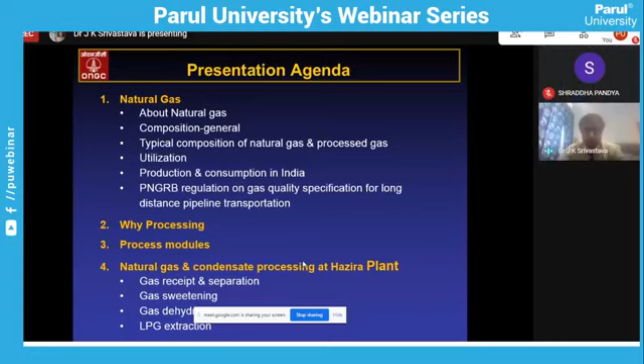Then the basic thing - why processing? Then what are the various process modules? I'll cover natural gas and condensate processing with reference to Hazira plant, because it is one of the largest gas processing plants in India, where I will briefly cover gas receipt and separation, then gas sweetening, then gas dehydration, then LPG extraction, then condensate stabilization, then dew point depression process, then sulfur recovery from acid gas.

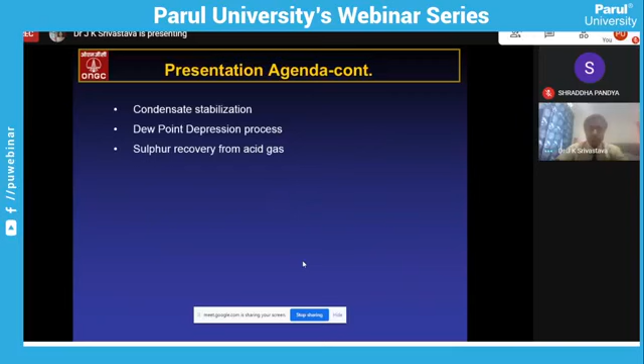Then first, let us begin with what is natural gas. Natural gas, as the name suggests, is the gas produced from geological formations from Mother Earth. You must have heard about oil wells, gas wells which are drilled, and ONGC is basically engaged - it's an E&P company, engaged in exploration and production of oil and natural gas. By saying natural gas, we mean that it's not produced by any refinery or any industry. It is what is being produced from the Mother Earth, from geological formations.

And broadly there are three distinct groups. One is non-associated gas, that occurs in the conventional gas fields. For example, in Mumbai High, there is a large field called Bassein field and Tapti field, which are gas fields where they are producing predominantly gas only.

Then associated gas, that occurs in conventional oil fields, like in Mumbai High, Heera. These are the fields where crude oil is being produced, and along with the crude oil, gas is also being produced, because no crude oil can flow unless it has gas dissolved in it. So whatever gas at the surface is released from the crude oil, that is what we call associated gas. These are fields like Mumbai High and Heera field, which are oil fields, and they are producing both oil and gas.

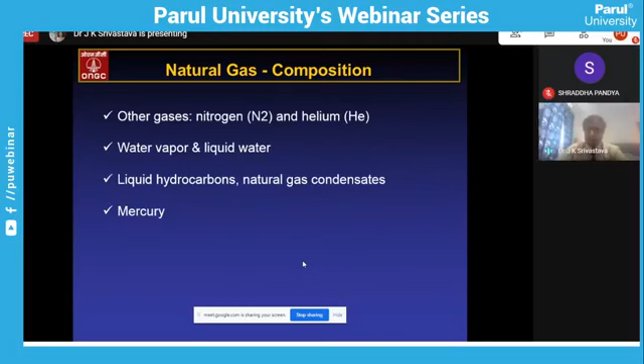It is absolutely dry, whereas the gas coming from the offshore field is fully saturated with water vapors, liquid water, everything, because it's coming through pipeline transportation from the offshore field to our shore terminal, so it has a lot of water vapor and liquid water. But once processed and sent to the pipeline to the end consumer, it is absolutely dry - bone dry, minus 62.

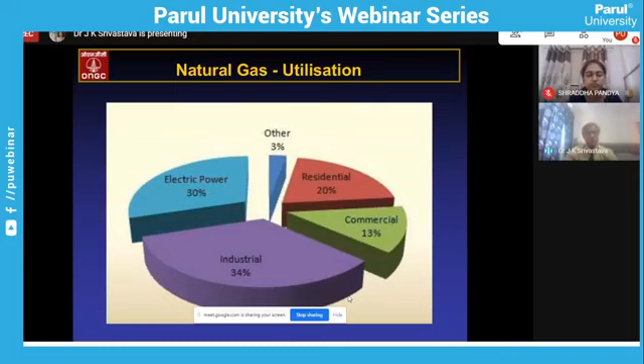Then this is the scenario within the country about natural gas production and consumption. As you can see, the total production in India is 32,876 MMSCM, that is million standard cubic meters, in 18-19. Then it dropped to 31,184, and again in 20-21 it is 28,671. Out of this, the major share is produced by ONGC - in 20-21 it is about 21,872 million standard cubic meters. Oil India and private JVs have a very small share. So the major producer of natural gas in India is our ONGC.

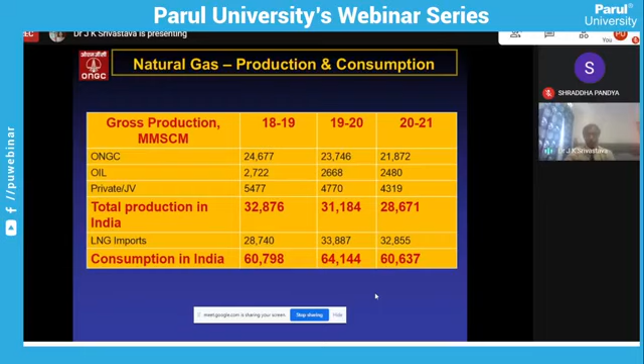When we talk about consumption in India, it can be almost double the production. Like in 18-19, it was about 60,798, or we can say 60.8 BCM, billion cubic meters. In 20-21, it has reduced, as you know, because the economy was hit during COVID and energy consumption also dropped. So gas consumption basically dropped to 61. The shortfall is met by LNG imports - about 28.6 billion cubic meters was our internal production in India, and about 32.9 billion cubic meters is our LNG import. So we are meeting the shortfall by importing. That is the scenario in the country about gas production and consumption.

Are you getting me? I am not getting any response, so I don't know whether I am audible to you or not. Yes sir, you are audible. Because in between if I can get some prompts, I am sure that whatever I am telling is going to the other side, because I cannot see the other side. No sir, you continue please, you are audible.

Now the basic question comes about natural gas processing. Why processing? That is what we are talking about, and that is our subject today: natural gas processing, why processing?

Basically, raw natural gas, when it is produced at an oil well, be it offshore or onshore, and when it is transported from the field gathering network to any processing station, it has a lot of what we call undesirables or impurities. So raw natural gas as such cannot be sent to any consumer or to any long distance pipeline system for the use of the end user.

So what are the basic objectives of natural gas processing? First, whenever raw natural gas is there, it is a mixture. It has natural gas, condensate, non-condensables, acid gases, water, and some sort of dirt and solids also. So it is not fit for use by the industry or for transportation.

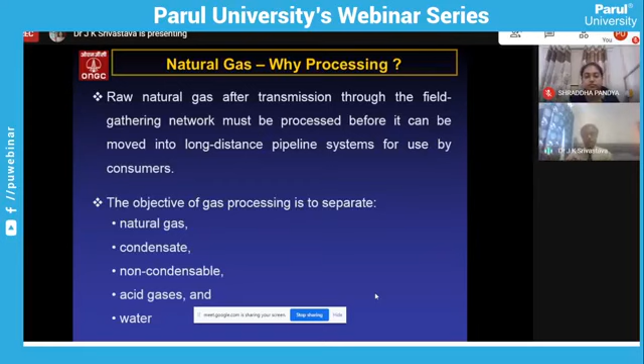Now we will see largely what problems these impurities or undesirables create. First, we see water vapor. It is a very common thing because in oil wells there is always a water drive in the reservoir, and whenever oil and gas is produced, water and moisture will always be there. So it is the most common impurity.

It is not objectionable as such, but liquid water - what happens? First, when a pipeline is pushing oil and gas, if it has liquid water, it will accelerate corrosion in the presence of H2S gas or CO2. So for any corrosion to initiate, liquid water has to be there. The gas anyway has CO2 and H2S, both of which are corrosive when combined with water.

Another phenomenon you may be aware of is that during pipeline transportation, because of expansion, the pressure drops, the temperature also drops, and cooling takes place. During this cooling, the temperature may drop to a level where the liquid water present in the pipeline may form gas hydrates - solid hydrocarbon or ice - which may block the transportation of gas in the pipeline. That is one of the major challenges.

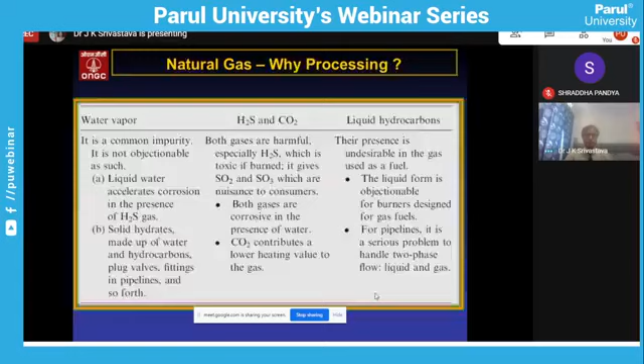So you can see these are the reasons why the gas needs to be processed before it is put to any economic use, before it is transported and other things. I'll discuss hydrocarbon dew point a bit more when we talk about the dew point depression unit, DPD.

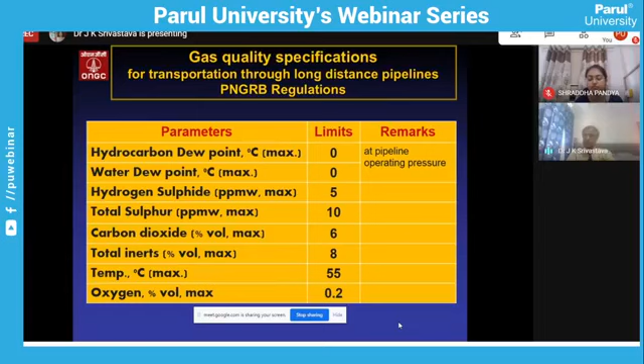Water dew point, as you know, is the temperature at which the gas-water system gets saturated with water vapor, and any further drop in temperature will lead to condensation of water vapor in the system. Hydrogen sulfide, total sulfur, these are the limits which one has to abide by, every producer has to abide by if it has to push its gas into the national pipeline or cross-country pipelines.

The various general process modules for natural gas are: the first unit of the module is the physical separation of the distinct phases, because normally these pipelines carry multi-phase flow—crude oil, gas, water, condensate. So first, the physically distinct phases—gas, liquid hydrocarbon, liquid water, solids—have to be removed at the receipt, at the entry point, what we call the battery limit of the plant. The first thing, where gas or condensate is received from the offshore field, is to separate these different phases before it is processed further.

Then the next processing step is gas sweetening. When CO2 or hydrogen sulfide is in significant concentration, the gas is to be sweetened for further processing. So gas sweetening is a very important process. In gas sweetening, depending on the end use, the cleanup target is decided.

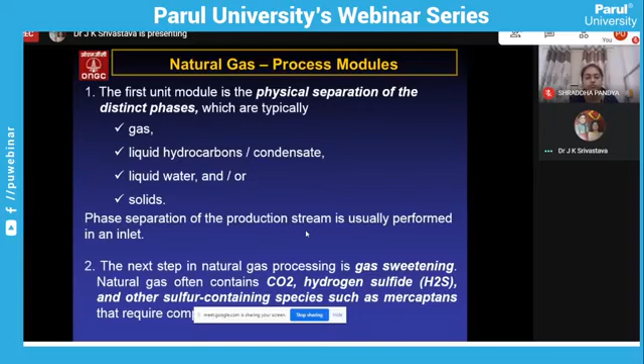Then gas dehydration module, as you know, because during the process of sweetening, which is mostly using the aqueous solution of amines, different types of amines or any other solvent, the gas is fully saturated with water vapor, because the temperature is also high, pressure, low pressure is there, so gas is fully saturated with water vapor. So before it goes to further process units, it is to be dehydrated enough so that it goes to further processing units. So gas dehydration is there, the gas dehydration module.

Then dew point depression, as I talked, because natural gas liquid recovery is there. Whatever heavier hydrocarbons are there, C3, C4, C5 and higher, they have to be recovered in that module. Then next thing is that condensate, because gas and condensate both are coming from the offshore. So condensate also has to be stabilized, fractionation module.

Then desulfurization of acid gas. When we talk of desulfurization of acid gas, because when we sweeten the natural gas in our gas sweetening unit, the resultant gases are, one is sweet gas, another is the acid gas. Means after scrubbing all the CO2 and H2S, that gas is vented, so that is called acid gas. But that gas contains very high concentration of say H2S, more than 10,000, 20,000 ppm, and that as such cannot be vented in the atmosphere because of the regulations, and otherwise also it cannot be vented in the atmosphere.

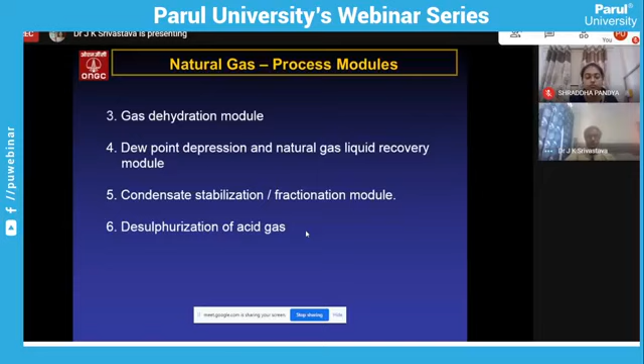These are the general process modules of a gas plant. Now instead of these general process modules, I will tell you the case study which is very apt for the Hazira plant, because Hazira plant is one of the largest gas processing plants in India. It has a design capacity of about 46.9 MMSCMD. It is processing 33 to 35 MMSCM gas per day and about 5,000 cubic meter of condensate per day. So that is the general background of the plant.

You see, I was telling about these. These are the fields in Bassein field, which is the largest gas field in India. Then this is Tapti field. So from Bassein field and Tapti field, there are two large process platforms, which we call as BPA and BPB. So two pipelines under sea, these two pipelines are emanating from there. One is 36-inch diameter and another is 42-inch diameter.

They are on the seabed, and the length of the pipeline is about 242 kilometers. These are the trunk lines in which the gas and condensate produced by Bassein field, Tapti field and other smaller fields are pumped. And from Bassein field, it is coming to Umbharat, that is a place near Surat, which is the landfall point. From the seabed, it is now on the land, coming at Umbharat. And Daman field also recently started producing, that is also pumping into these pipelines.

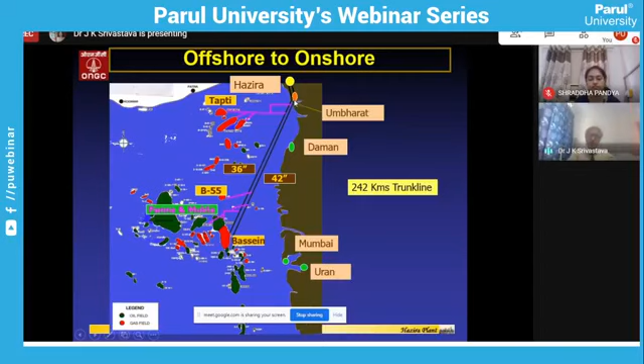Daman is also producing gas. So this is about 242 kilometer length, two pipelines, one is 42 inch, another is 36-inch pipeline. From this offshore field, that subsea pipeline is coming at the surface near Umbharat. So at Umbharat there are two valve stations, and this pipeline undergoes under what we call the Mindola and Tapti rivers. These two rivers are there, and these are the various valve stations. And now it is coming and joining at Hazira plant.

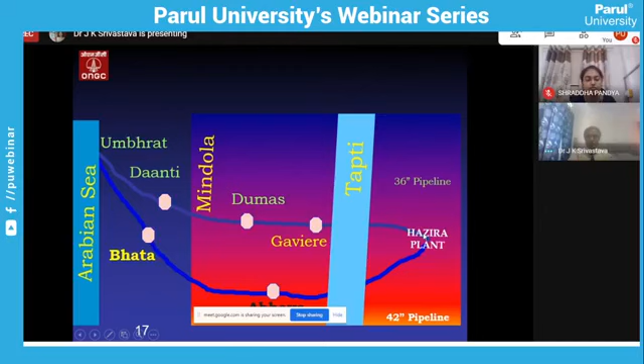This is Hazira plant. It is very important because this is the energy lifeline of North West India. All of you must have heard about the HBJ pipeline, Hazira Vijaypur Jagdishpur pipeline. That pipeline is now operated by the Gas Authority of India, and it is more than 3,300 kilometers long.

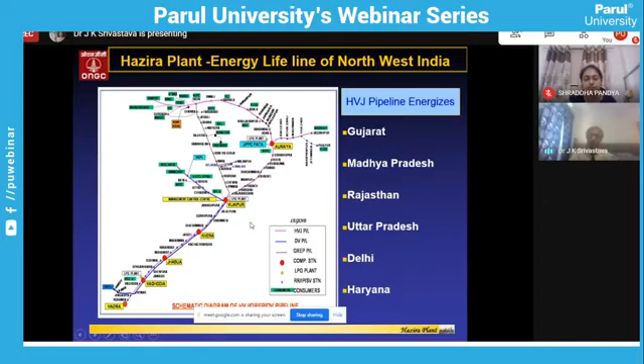It carries gas to about 6 states throughout India. Our plant, Hazira plant, is the mother plant of this pipeline. So we are giving gas to this pipeline, and just opposite Hazira plant, this GAIL terminal is there. From there GAIL takes the gas, we transfer it into that pipeline to GAIL, and further onwards GAIL looks after the pipeline transportation, and it goes all the way up to Delhi, Haryana. The pipeline length is about 3,300 kilometers.

Now I'll show you the various processes, a block diagram of the various process modules, or what we call the process flow. So the gas and liquid both come first to the gas terminal. That is the battery limit, what is called the gas terminal.

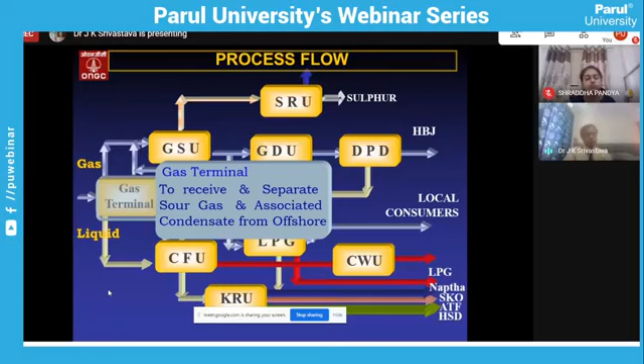In the gas terminal, the purpose is to receive and separate sour gas and associated condensate from the offshore. So from the gas terminal, there are two streams: one is gas, another is condensate. The gas goes to the gas sweetening unit. That sour gas which is separated at the gas terminal goes to the gas sweetening unit for removal of H2S, and we are using the MDEA process, by selective absorption in methyl diethanolamine, at the GSU.

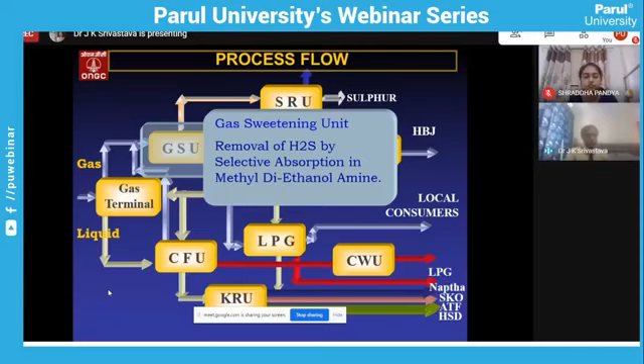Then from GSU, that gas goes to the gas dehydration unit. As I explained, in the process of sweetening, the gas becomes fully saturated with water, so we have to remove all the water, moisture, water vapor, everything. So from GSU it flows to the GDU, gas dehydration unit.

And in the GSU, whatever is the vent gas or effluent, what we call acid gas, goes to sulfur recovery. From the sulfur recovery unit we get solid sulfur, and then the resultant gas after sulfur recovery is vented. That sweetened gas, or sweet gas as we call it, goes to GDU.

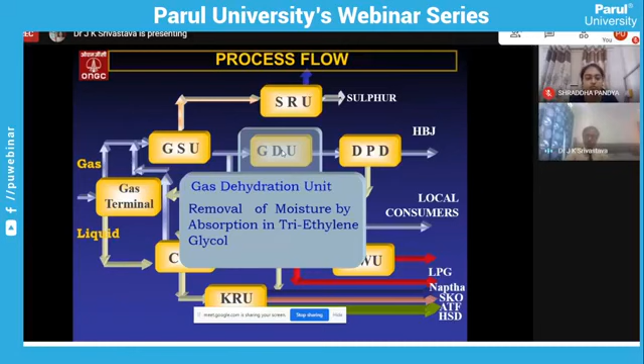At GDU it is dehydrated, and I'll explain the process briefly afterwards. Then from GDU it goes to DPD, the dew point depression unit, for removal of liquid hydrocarbon to make it suitable for transportation through the pipeline, now increased to 2,800 kilometers in length. Because during transportation, liquid hydrocarbons may drop out in the system, which can create operational problems.

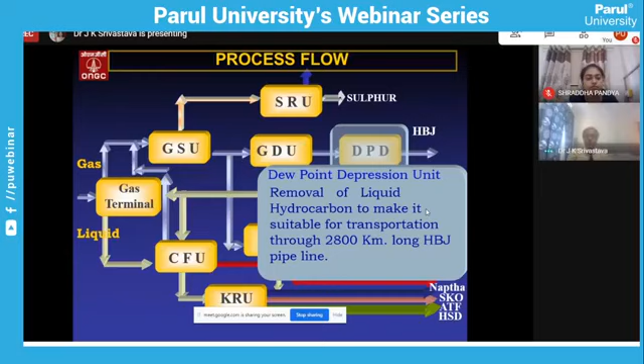That can reduce the pipeline carrying capacity and other things. The dew point depression unit is designed this way because along the HBJ pipeline, GAIL has also put up some LPG plants and petrochemical plants. In LPG and petrochemical plants, they require some concentration of higher hydrocarbons like C3, C4 and others. So the DPD is designed such that we cannot remove all the heavier hydrocarbons here. Some amount of heavier hydrocarbon passes through, and that is the condition of hydrocarbon dew point, which is as per PNGRB guidelines. It has to be maximum 0 degrees centigrade, whereas we try to maintain it up to -5, so that condition is also met.

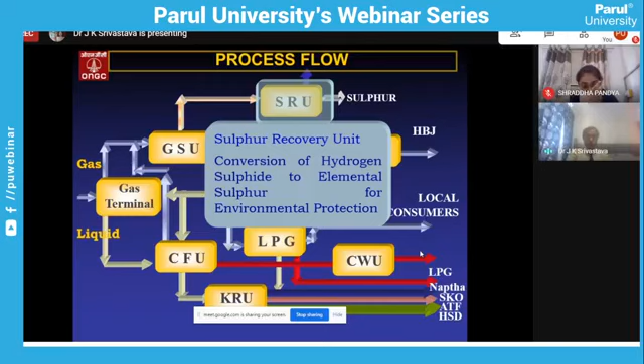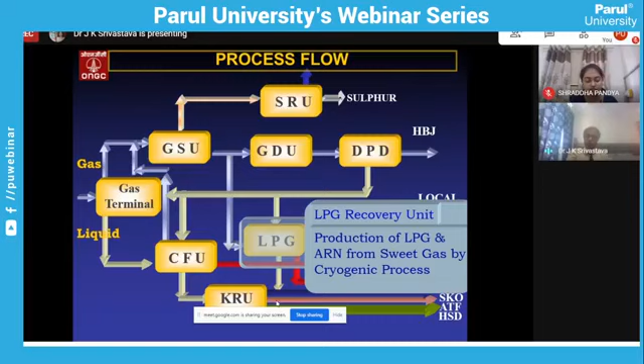Then at sulfur recovery, as I explained, we convert hydrogen sulfide to elemental sulfur for environmental protection. And from GSU, part of the gas comes to the LPG plant. From GSU the sweet gas splits: one part goes to GDU, and another part comes to the LPG plant, where we produce LPG and naphtha from the sweet gas by a cryogenic process. The LPG is produced using the cryogenic process, which I will briefly explain.

Then the condensate - this is regarding the pathway of gas. Now from the gas terminal, another stream, the liquid stream, is condensate. It first comes to the condensate fractionation unit, because that condensate is also sour condensate, having H2S and other things, and lighter fractions are also there, because the system here is at about 60 kg or 64 kg. So of course some lighter components will always be dissolved in the condensate, and H2S will also be there. So it comes to the condensate fractionation unit, where we fractionate the associated sour condensate.

In the process of fractionation, we strip the lighter components - C1, C2, C3 - and the H2S, and take the remaining portion for LPG recovery. So there are two streams: one is the sweet gas from this place, which goes through cryogenic process, and the sweet condensate after stripping lighter hydrocarbons and H2S, where LPG production also takes place.

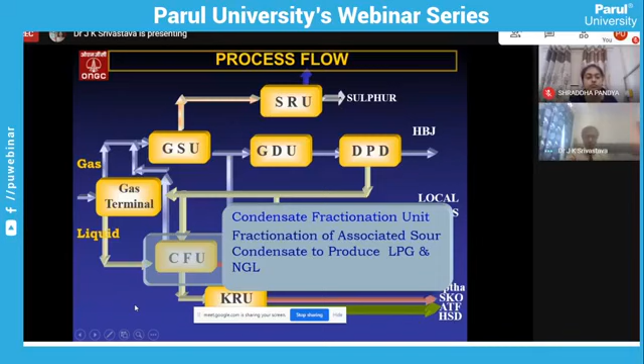Then after stripping the condensate of lighters and H2S, and recovering LPG, which is basically C3 and C4, the remaining condensate, which we call NGL, goes to the kerosene recovery unit, where various value-added products like naphtha, kerosene, ATF, HSD, and HFHSD are produced.

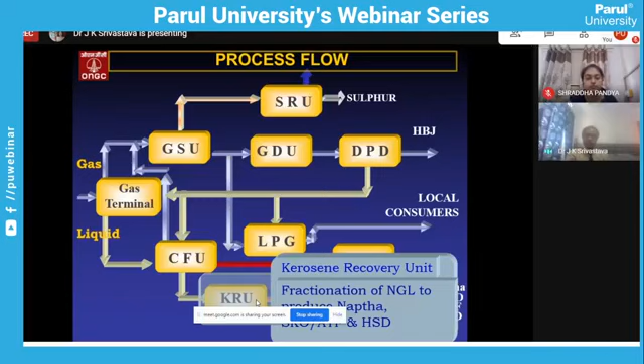Then the LPG here produced by the CFU. In the CFU, whatever LPG we produce also has a higher concentration of H2S, because H2S produced by the CFU is having higher concentration. So because LPG has a very strict requirement of say 4 ppm of H2S, it goes to the caustic wash unit, where using the caustic wash process, this H2S is removed from the LPG. Then only it can be sent to consumers.

So this is a process flow where various process modules, how they are interrelated and interlinked in the gas processing plant, a typical largest gas processing plant, that is the Hazira gas processing plant, is explained.

Is there any feedback or anything you would like to know, which I can clarify further? Hello? Please continue, sir. I will ask questions at the last, at the end of the session. Okay.

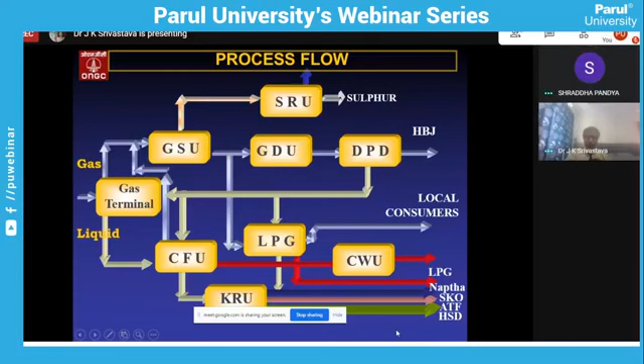Now first, at receipt, as I said, is the gas terminal. I am giving you a simple cross section of the system which we call a slug catcher. It is nothing but a large pipe of about half a kilometer length and about 48 inch diameter. We call them fingers, and they are slanted, as you can see. So there is an entire area where these 24 fingers are laid out like this, and they are basically acting as a separator, where condensate and gas separation takes place.

Like you can see, this is just a cross section of a single pipeline. It is a huge area where these things are laid out. There are 24 fingers, each about half a kilometer in length, and about 48 inch pipe diameter. They separate oil and gas, and they store the condensate temporarily. It's a continuous process. From there, the condensate goes through metering and then it goes to CFU, that is condensate fractionation.

As you can see here, the risers are there, and this slope is there. At various places risers are there, and they are all equalized, and through these risers the gas is removed. So this 16-inch riser, then 12-inch riser, 8-inch riser. So all these, the major separation takes place here, the gravity separation. It is coming, the gas goes here, and whatever remaining gas is there, it goes here.

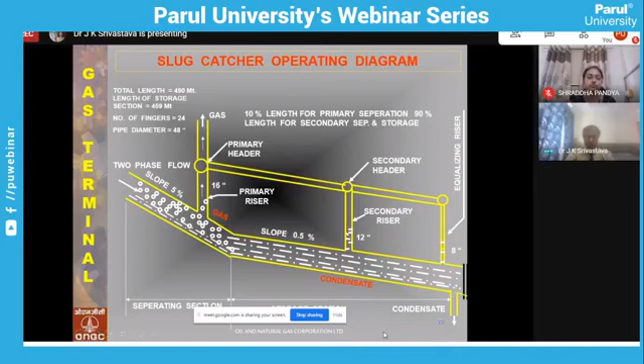Now come to gas sweetening unit. The process of gas sweetening, as I explained, here in this particular Hazira plant where we are handling sour gas, our purpose is to remove the H2S and bring it below the level stipulated by the government authorities, by the regulatory board, below 4 ppm, whereas in our inlet we have more than 300 ppm.

So there are various technologies available, that is we are using amine scrubbing, and the main alkyl amines used in the gas sweetening industry are MEA (monoethanolamine), DGA (diglycolamine), diisopropylamine, and MDEA (methyl diethanolamine). So we are using the MDEA process, and why we are using MDEA process, and what are the relative advantages?

It all depends on what our purpose is. We are sweetening the gas for which purpose? What are our input conditions? What is the quality of input gas? What are the pressures, and what are the quantities? There are various factors in the design basis which dictate which process is to be utilized.

So we are using MDEA, as you know, our purpose is primarily to remove the H2S. So the general process chemistry is that MDEA, being a tertiary amine, reacts instantaneously with H2S through a proton transfer, and during the regeneration process, this H2S which is trapped in the MDEA is released, and MDEA becomes free.

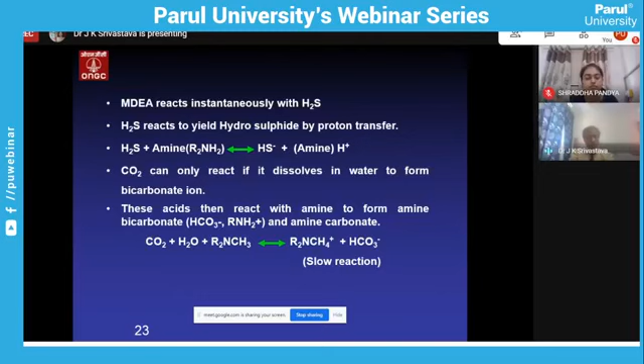Process chemistry is very intricate, and one has to understand it thoroughly, then only it can be successful. Like I'll show you a cross section of the absorber, that high pressure absorber. There are various field equipment and all that, pressure valves, knockout drums, and other things.

Now these trays, where the amine can enter and where the contact can take place, that contact time, that height, everything is optimized depending on what is the concentration of the various components in the gas, and what are the other parameters. This has to be controlled.

So this is a very interesting process, where if the H2S loading is very high, then the contact time will be different, because the plant and this absorber are designed based on certain input criteria. So if the H2S loading is very high, one has to increase that contact time accordingly. If the H2S loading is less, and if you increase or decrease the contact time, it may have other implications which are not desirable.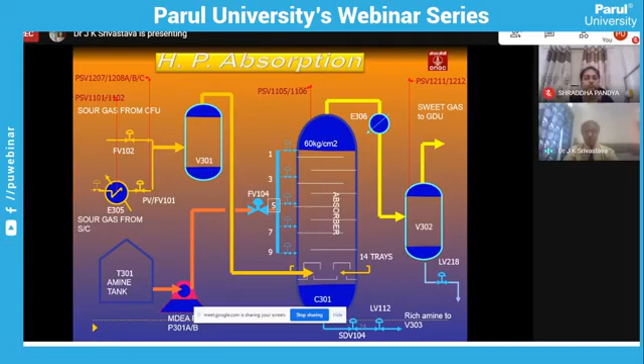In a regenerator column, pressure swing is there. I have shown you directly the regeneration column, but intermediate there is a flash drum also. From 60 kg it is flashed to about 6 kg, and then it comes to 1 kg, that is atmospheric pressure, where it is flashed, and steam stripping is done to remove H2S from the rich amine.

From the rich amine, amine flows from the top, and through steam stripping whatever absorbed H2S is there gets removed, and the resulting amine is free from those things. So again we call it a lean amine. Lean amine means there is minimum loading.

Lean amine is with respect to the H2S and CO2 - the loading of H2S and CO2 is minimum or no loading. Rich amine means it is fully loaded with the absorbed H2S and CO2. So that is how it is there.

Then this gas which is released from the rich amine is acid gas. This is what is called acid gas, having mostly CO2, H2S, and some amount of hydrocarbons, though our endeavor is to control the release of hydrocarbons, because that is a loss of a value added product. But nevertheless, some hydrocarbons, say about 1% or below, always it is having about more than 90% CO2 and about 10,000 to 20,000 ppm of H2S.

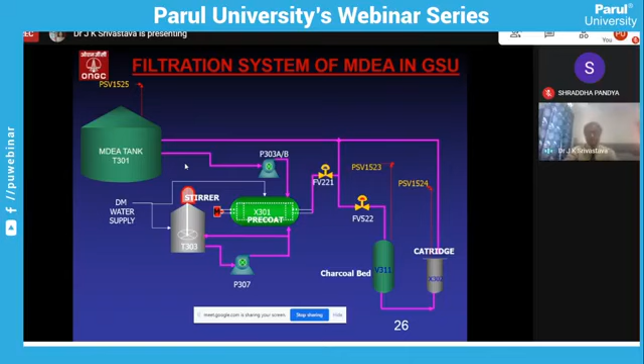Then we have a charcoal bed, where if there are traces of liquid hydrocarbons coming, they are also taken care of. Then there is a cartridge filter, where any dust, dirt or particle is removed. Then the regeneration, as I've already told, this is a filtration system.

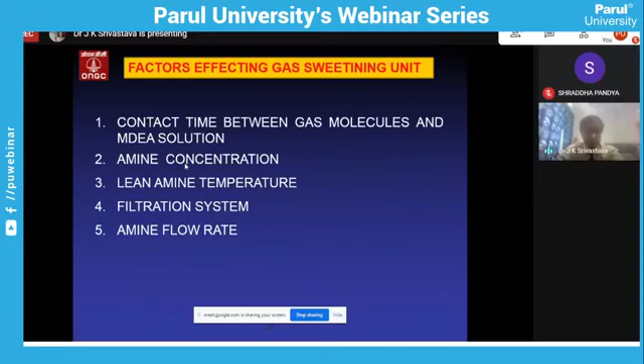As I have told, there are various factors like contact time, amine concentration, lean amine temperature, filtration, which I have explained, and how important they are. Then filtration - pre-coat filter for iron sulfide and iron carbonate, charcoal and cartridge - are there taking care of all entrained microsolids and other things.

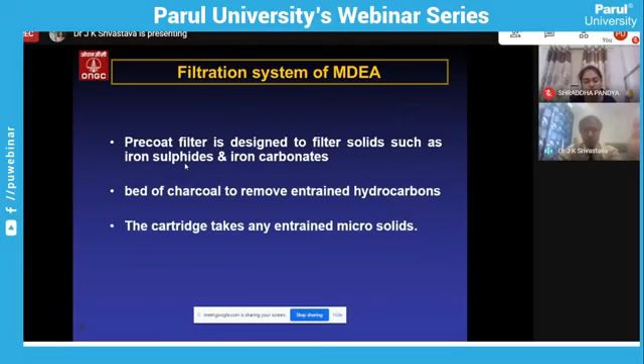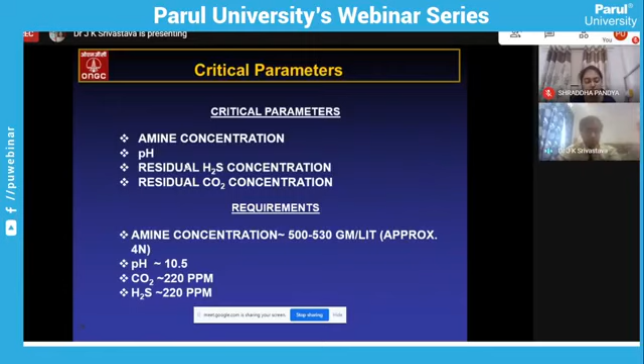They are the critical parameters which have to be maintained, like amine concentration, pH, residual H2S concentration, residual CO2. There are a lot of other things. Very briefly I have just given you an overview.

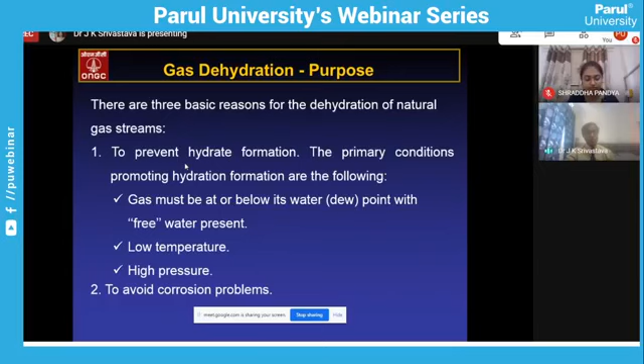Now comes the gas dehydration. Purpose, as I have already told you, there are 3 basic reasons for dehydration of the natural gas stream. One is to prevent hydrate formation, as I explained, then to avoid corrosion problems. So what process is normally obtained for dehydration?

It's also a downstream processing requirement in most processes. For example, you know about CNG and LNG, the liquefied natural gas and compressed natural gas. In liquefied natural gas, the temperature goes to say minus 161 degrees or so. So if your feed gas or natural gas is having even traces of water vapor, it will disrupt that process. So for the CNG process, for the LNG process, the gas has to be bone dry. So depending on what is the ultimate application or usage of that gas, this gas dehydration is very important.

For example, in LPG, when we produce LPG from the gas through a cryogenic process, the temperature may go down to minus 50, minus 60 degrees centigrade. So the gas which goes to LPG recovery through a cryogenic process has to be bone dry. All moisture, all traces of moisture has to be removed.

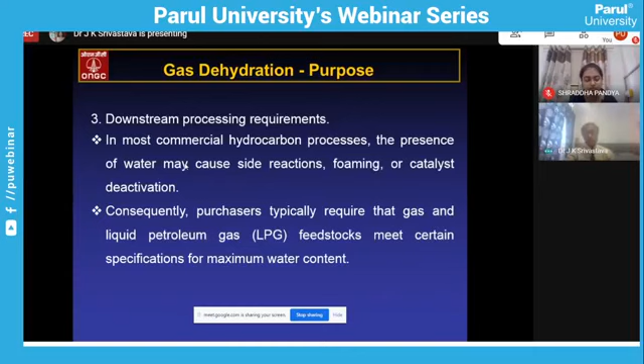Absorption and adsorption processes are there. Both processes we use at Hazira plant, but the purpose is different. The basic principle is that a hygroscopic liquid is used to contact the wet gas to remove water vapor from it. TEG is the most common solvent used. TEG absorbs water from the gas until the equilibrium partial pressure of TEG and water is reached. Here also counter current flow is there - TEG is coming from the top and gas is going from bottom to top, and mass transfer takes place. All that moisture, TEG being hygroscopic in nature, is absorbed, and when equilibrium partial pressure of TEG is reached, the TEG is regenerated, by almost the same process as gas sweetening. This process is more favorable at lower temperature and higher pressure.

Another dehydration process is the adsorption process using a solid bed. This is used when a very low dew point requirement is there. For example, the gas after the TEG dehydration process has a moisture dew point of about minus 40 or minus 42. Whereas the gas after dehydration through a solid bed - molecular sieve - which we use in the LPG plant, has a moisture dew point of minus 62, minus 63, even minus 66. That level of dryness is required because the temperature downstream, where LPG recovery takes place, reaches up to minus 40, minus 50, minus 57. So that is the purpose.

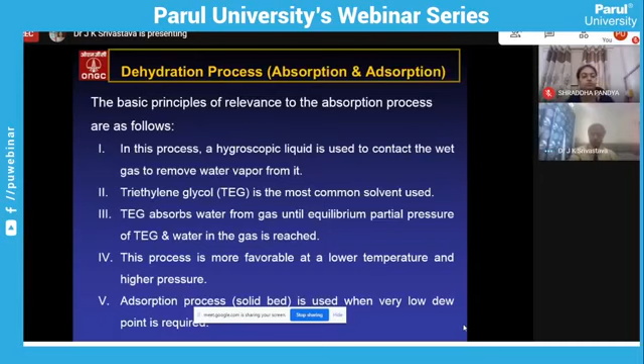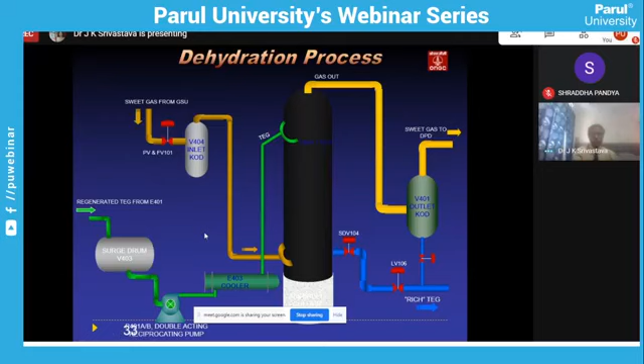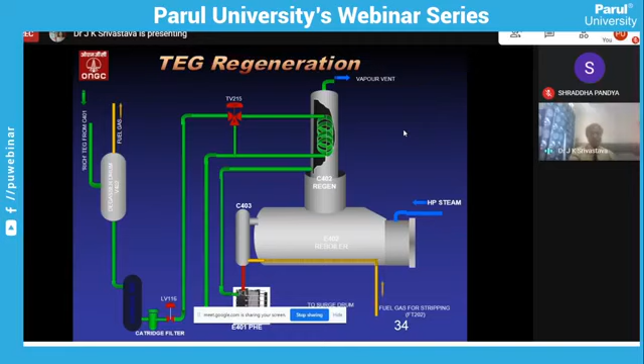Again, simply put, TEG is coming from the top, gas is going from the bottom, and mass transfer takes place, and water is removed. Then there is regeneration, where steam stripping is done. The TEG undergoes steam stripping, and that moisture is removed from the TEG, and that TEG again goes for the regeneration part.

Then it goes to the cold box. Basically, the cold box is a system where heat exchange takes place between the colder stream and the hotter stream. From the cold box, after exchanging heat, the gas goes to the first stage separation, where whatever liquid is formed is removed, and the gas again goes to the chilling process, where it's used in a turbo expander - the expander compressor - where the pressure is dropped. Using this turbo expander, it is chilled up to say minus 50-57 degrees, and then again it goes to a separator, where the gas is removed and the liquid is there.

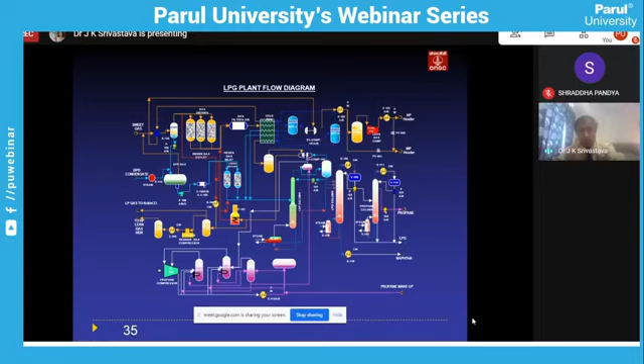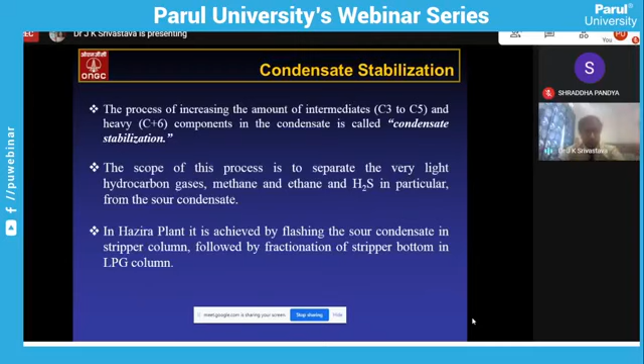Okay, I will just quickly sum it up. So this is the process - it goes to the light end fractionator, then it goes to the LPG column, then condensate stabilization, as I have already explained the purpose of stabilization of condensate. Here also the process is, first it goes to a stripper column where the lighters - that is C1, C2 and H2S - are stripped, and the bottom goes for LPG recovery, where LPG is recovered and the remaining one is called NGL, which goes to the kerosene recovery unit.

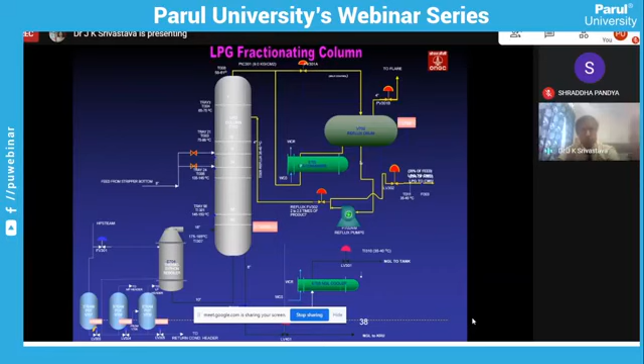In dew point depression, we use a propane chiller. Gas from the GDU (gas dehydration unit) passes through a heat exchanger where the propane chiller is used, and the resulting condensate recovered from this DPD process goes for LPG recovery, while the gas goes to the consumer.

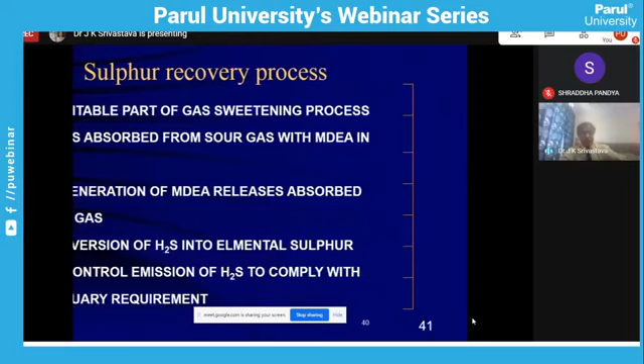Then in the sulfur recovery unit, as I explained, this is a very important part of the gas sweetening process. Here H2S is about 10,000 to 12,000 ppm, whereas the vent gas is required to be below 30 ppm.

For sulfur recovery, we are using a liquid catalyst - the LO-CAT process. It's a proprietary process of Merichem. These are the chemicals used for the liquid catalyst oxidation process.

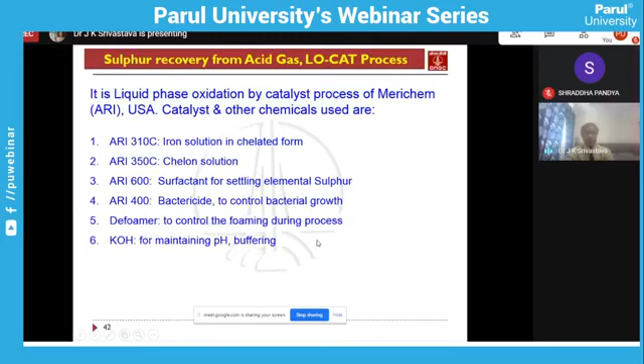Basically this is the ARI 310C, an iron solution in chelated form, then chelant - that is chelate solution, surfactant, bactericide, defoamer, and KOH. The reaction chemistry is also very interesting.

Absorption means H2S is first dissolved in water, and then in two stages it ionizes to give a sulfide ion, and it is dependent on the H2S partial pressure.

Solution pH here is most important, because once H2S goes into the liquid and sulfide ion is formed, it is an acidic moiety, so solution pH reduces very speedily. Once the solution pH is low, the H2S breakdown will not occur - the ionization of H2S will not happen.

So buffering is done here - maintaining pH is extremely important. That is why KOH is used to buffer this solution, so that the reaction always favors the forward direction.

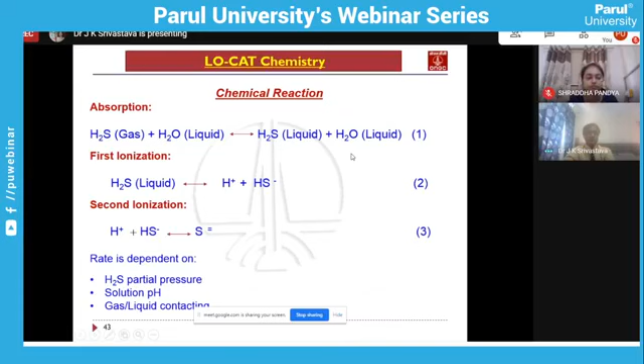Then sulfide oxidation is done using the iron solution, that is ferric iron. It transfers the electron, makes solid sulfur, and ferrous iron is formed. Here iron is used as a reagent which transfers the electron.

It works as a catalyst also because it is regenerated back, and 2 moles of iron are required per mole of sulfur. Then the ferrous iron is oxidized back to ferric iron by air, taking oxygen from the air. This is the overall reaction.

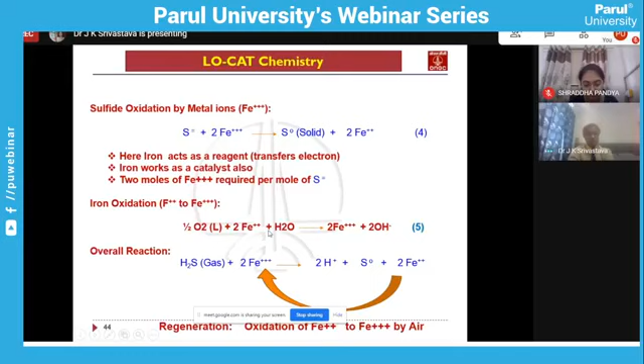This is very interesting because chelated iron is used since iron as such has very low solubility in water, about 4 ppm. But when chelated, it has a solubility of 40,000 ppm, like 4%. The ferrous iron is again oxidized into ferric iron using atmospheric air oxygen, in a very controlled way.

Thank you, that's what I wanted to give you as a brief outline. Though the entire topic is very interesting and could be a full course in itself, I tried to make the maximum of it. If you have any questions, you are welcome.

Yes sir, I want to know one thing - what are the criteria for storing natural gas in the reservoir?

For storing, it is already there in the reservoir - you drill it and then produce it, exploit the natural gas. Let me explain: the oil well is there, and crude oil is always the same family of hydrocarbons, from C1 to say C120 or higher. The higher hydrocarbons, which are liquid, form the crude oil complex mixtures. Gas is always dissolved there in the oil, and if the gas is not dissolved, the oil will not flow - we call it dead oil. It gives most of the energy that drives the oil to come to the surface.

So it is already stored in what we call in oil reservoir terms a trap - within a geological trap it is stored. When you drill it and open that, it flows in a controlled manner. So it is stored in a natural reservoir - it's not man-made. It is a natural reservoir that has been deposited over millions of years.